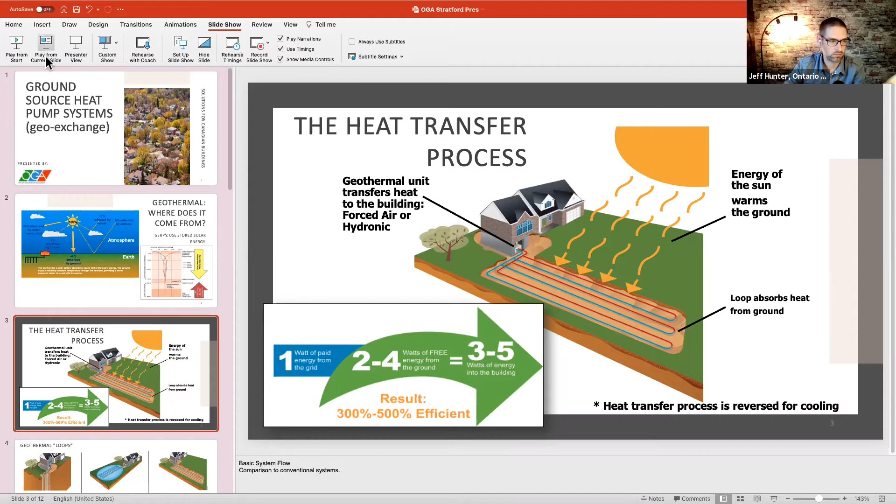Why don't I... Or do you have a split monitor? Yeah, did you go to a different screen? Yeah. So can you see the difference now? The change? No. Uh-oh. Oh, you're on that screen because I moved the... Oh, okay. I got you. How do I do that? I'm just going to do this quickly. Vanni, I didn't even clue in. I was just going through this. Well, I think it's the next screen down. What do you see now? Same thing. Okay, let's do this. Well, you've changed the page, but it's showing the whole slideshow instead of the actual screen. Yeah, we see your slides on the side as well. Oh, you do? Okay. There, got it? And does it change? Different slide? Yeah. Okay. Perfect. You don't know how many times that's happened to me, and the multiple monitors just make it more complicated. But okay, so yeah, this is

typical pipes, heat pump in the building, and it's very efficient. The ground loop allows us to be very, very efficient because of those constant stable temperatures. We're able to drive efficiencies of 300 to 500%. And the energy that we're getting from the ground is a renewable source. That thermal energy will always be there for us to extract.

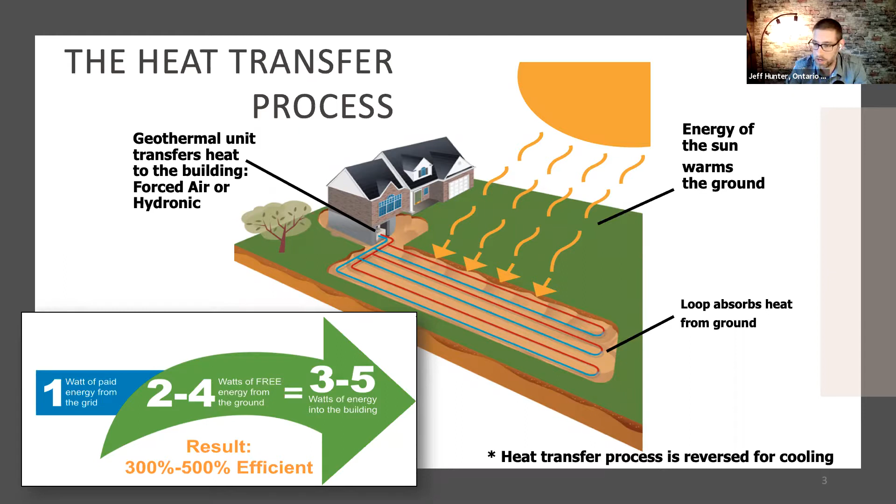And so we design a piping loop based on the energy requirement of the home. So after understanding how much energy we need to put into the home in the wintertime for heat, and how much we need to take out in the summertime to make sure you stay cool, we're able to figure out how much piping we need to put in the ground. And that can happen in various different configurations depending on the application.

Now, single family homes are of a couple of configurations. In urban or suburban areas where there's not as much room, we need to drill down vertically in boreholes. They're called boreholes, just like water wells that you're probably familiar with. These are closed boreholes where we put the pipe in and seal it up and connect all those pipes together.

In cottage country or communities with lakes or ponds, we can utilize surface water resources like this and essentially put piping into the lake or the pond, sink it to the bottom, and use that lake or pond as our thermal resource. It's very efficient to transfer energy to and from a water source.

And then there's the horizontal application that we looked at before, and this is very typical in rural areas outside of Stratford. This is exactly what Buchanan and Hall would be doing a lot of: when you have some acreage and some room, we can install those systems horizontally.

Now, commercially, geothermal is very popular right now in the Greater Toronto Area, and I've done a number of projects there with larger buildings, because the economies of scale in a commercial building have allowed for utility type models to come in and offer geothermal solutions to, let's say, condo corporations. They'll come in and drill these vertical loops, capitalize it, and then lease that out to the condo corporation, which pays a monthly lease agreement for the utilization of that energy.

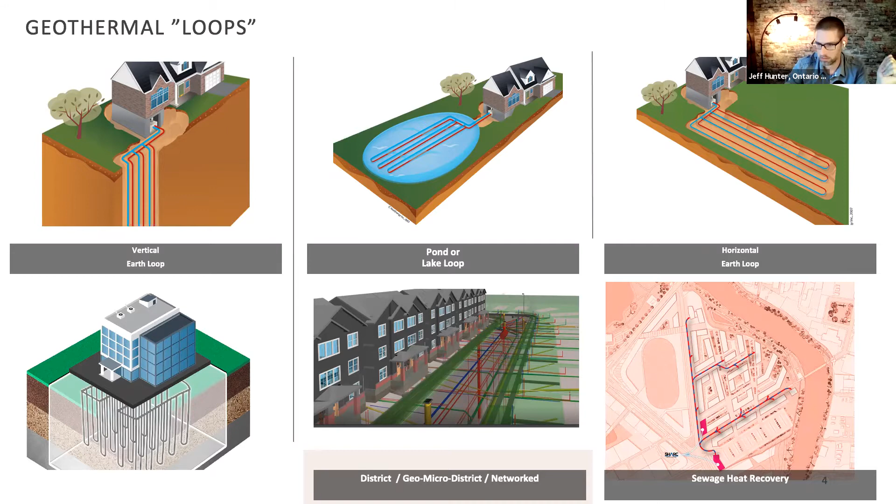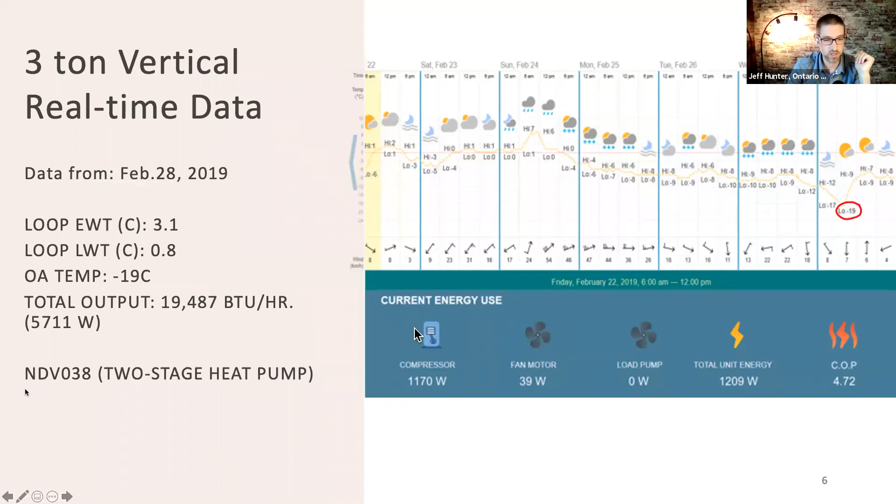And that has huge impacts for the homeowner, because the electricity they're paying for is now being multiplied by almost 5 times. The utility is essentially shaving the peak load. So if you think about in the summertime, most electric utilities are summer peaking because everyone has their air conditioners on. Well, now that peak load is able to come down because your systems are so efficient. But then also electric utilities now get the benefit of shifting the load off of the gas company into their own fold. So their base load comes up a bit, and they're able to serve customers better. So efficiency is the main kicker here.

Okay, and just, oops, I went too far. And just to give an example, this has been done before as far as large scale transformation and adoption. And I can tell you, the federal government, I don't know if you just saw the Greener Homes program come out recently from NRCan. That's one policy measure that they're looking at, but this has been on their radar for a long time, electrification and transformation of space heating to electricity.

And the OGA recently did a study that hasn't been released yet, but we did a scan of jurisdictions around the world that have gone through this before, and Sweden is one of them. They started decarbonizing their space conditioning back in the late 80s. I think they actually got into it in the 70s, 80s when the oil embargo was going on, and they were mostly oil heated. So you can see a bit of their transformation as far as capacity of the space heating market that is ground source heat pumps. This is market share for ground source heat pumps, so almost 60%.

It starts to dip a little bit as air source heat pump technology plays in. And certainly in most communities across Canada, as we look at electrification, it will be a mix of air source and ground source technologies, but adoption was quite high.

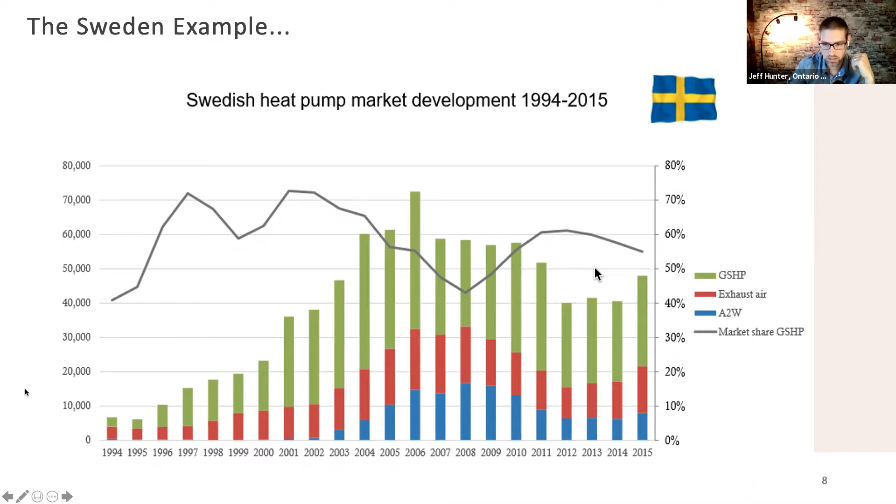And this is a look at a town in Sweden, I don't know how to say it, Sundbyberg. These are all geothermal installations, and likely all vertical installations, because this is a suburban town. These are all individual boreholes. There could be multiple boreholes here to service each of the homes. So they're not networked, they're not connected together.

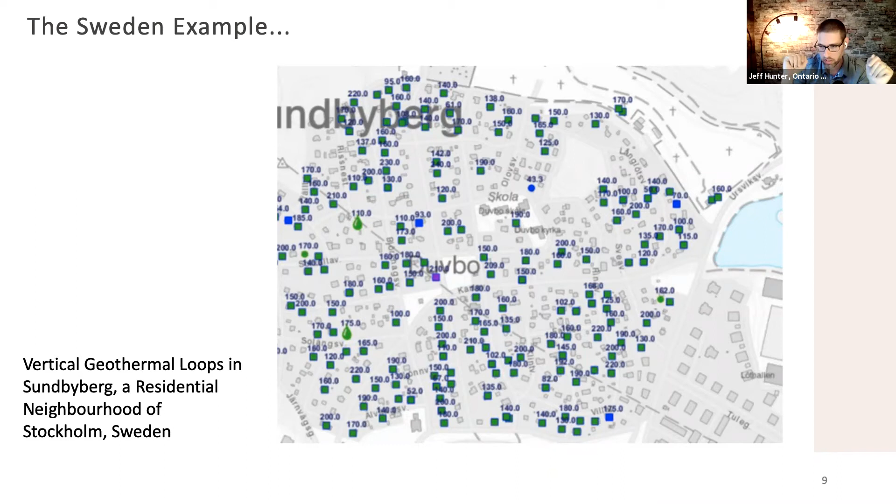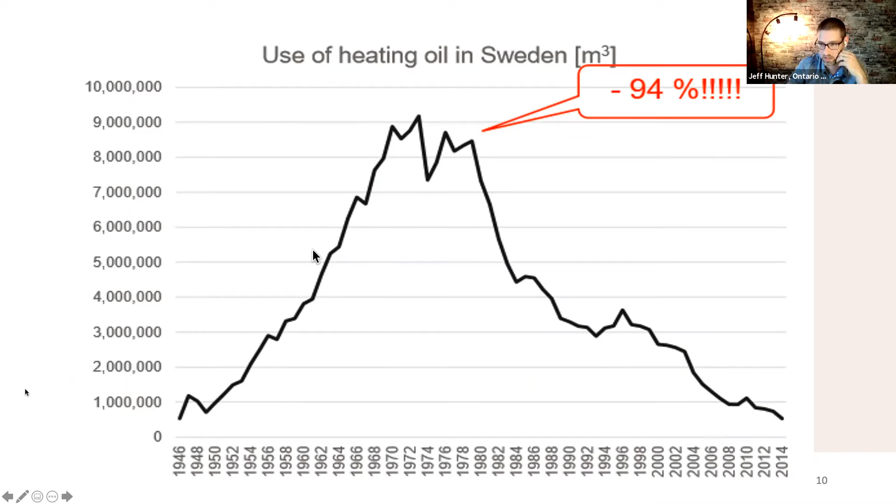So they're not sharing and getting the benefit of that sharing, but you might not see that happening where you don't have large diversity of loads. If it's all just houses that are built the same, that have the same kind of heating and cooling profile, you might not get the extreme benefit. And then you can see what happened to, I mean, mostly Sweden was heating with oil beforehand, and they desperately had to do that. So that's why they were so aggressive with it.

Oops. Okay. So that is a short primer. Rose, anything you want to add from a local perspective in Stratford, tagging on to that? I don't want to miss anything. No, you did a great job, Jeff. Thanks. Thank you. So, questions?

Just before we go to questions, I want to apologize because I really messed up your names and what you're representing. It was right in front of me, but I don't know. I was just like, oh, Jeff's representing three different. No, there are two guests here, so welcome and my apologies. It's okay. It's Friday, right? Yeah. No, it's Thursday. Is it Thursday? Oh, Thursday. I knew that. It should be Friday.

Okay, so I saw a hand up. Oh, Jody. So I'll pass it to you, Jody. Thank you. Thanks for the presentation. So one of the questions locally, I think we asked at the last meeting, was that we do have local aquifer as our water source. So we have wells all around the city, smaller wells. So I'm wondering how that plays into it when we're talking about individual residential and going vertically, what kind of problems that might present.